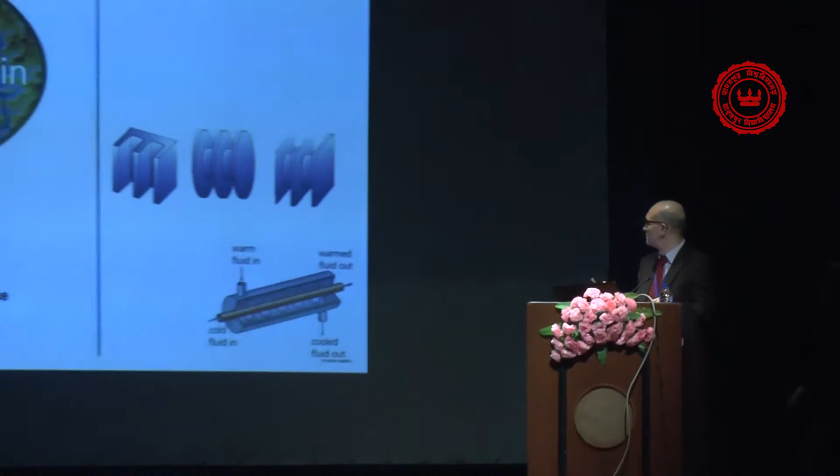What I plan to talk about is something which looks more academic. I'll put some presentation because I saw that so many young staff or students prefer to remain on the dark side. So perhaps I will be able to attract them. I'll try to see if it works. No problem, I'll use my mouse. Yeah.

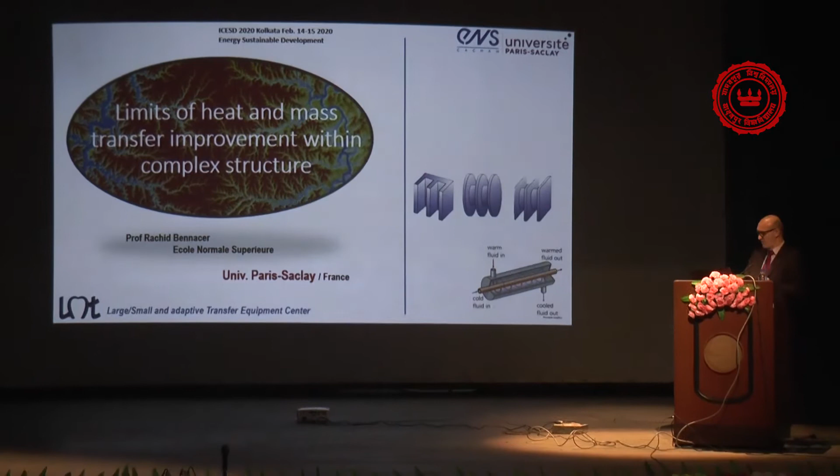Good. Before giving the talk, you may see that I am from University Paris-Saclay, which is near Paris. It's good also to present these things because it's good to know each other. Then we come back to the scientific aspect. Previously it was federal universities, and it includes my university, University Paris-Saclay. You see the founding members, and what is important is it integrates 13% of all French research. It has an advantage because it's a campus where companies or R&D companies establish or move on the campus to create some symbiotic things.

I thank the colleague previously from Tata who presented industrial work interacting with the universities. This morning we were talking about interaction between academia and industry. I forgot to mention there is another good formula we have in France. It's not only the ministry or government who give scholarships for PhD. We have what we name CIFRE. It means a PhD is hired by the company and uses the laboratory facilities, so he's really an employee of the company, which creates innovative subjects and others. Some of those I'll talk about later.

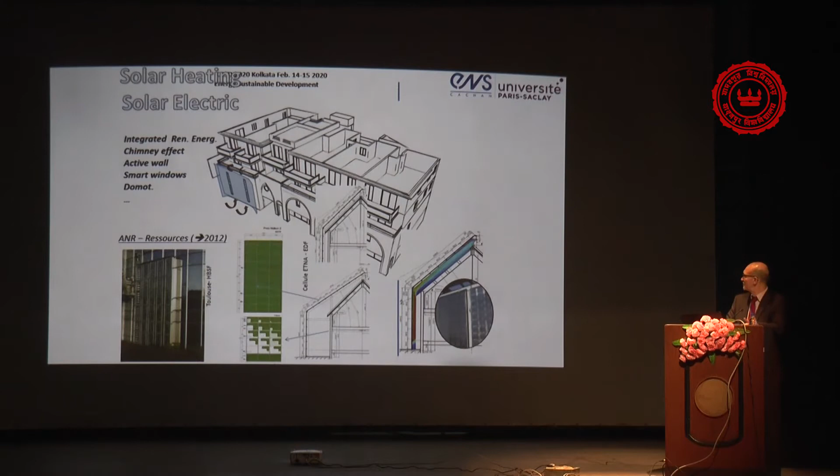What else? This is to forget about, no need.

We were talking about how sometimes people discuss what is fundamental, what is applied, and so on, which is the best. I like to say that they are all the best. Do what is useful.

This is one subject. It is on solar collectors. We work on hybrid solar collectors, so they produce electricity and heat the water. We did it in a lab. We did it in situ, and we also try, when the demand is uncertain or strongly variable, to define the new variables. I mean, also from a very applied subject, you can get a beautiful fundamental subject.

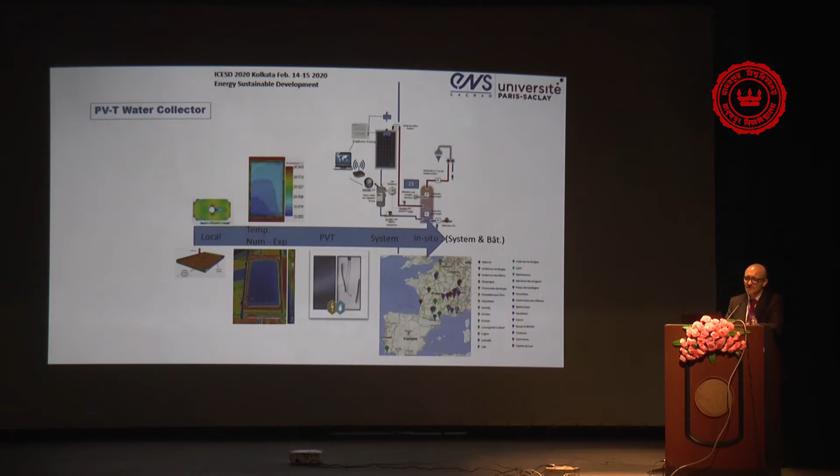In this case, you see all the points from Belgium in the north, on the map which is below on the left, until Portugal. Those are all the installations we put in situ, monitored and followed, and you can always find beautiful subjects. For this reason I say, if the question is well defined, then the answer could be beautiful.

What else can I say? Then I was talking about solar collectors. We were talking this morning about PV cells. I will not talk about the microstructure of PV cells. We are not in physics on this aspect. But just remember that the improvement of efficiency gives us the opportunity to multiply the produced electrical energy.

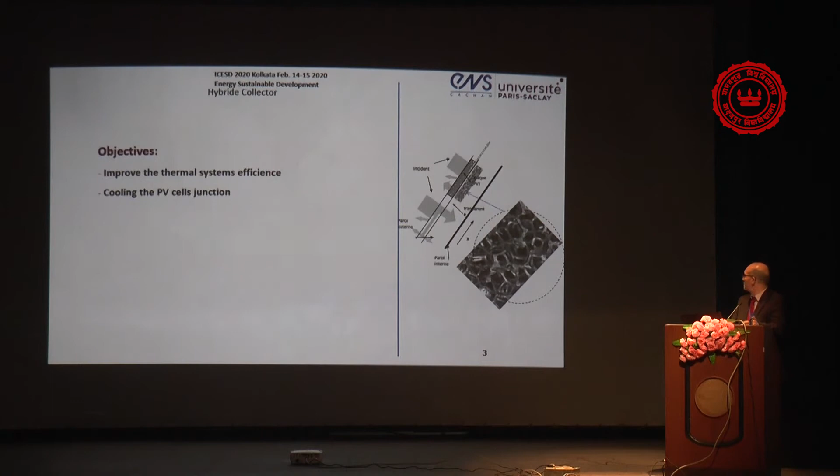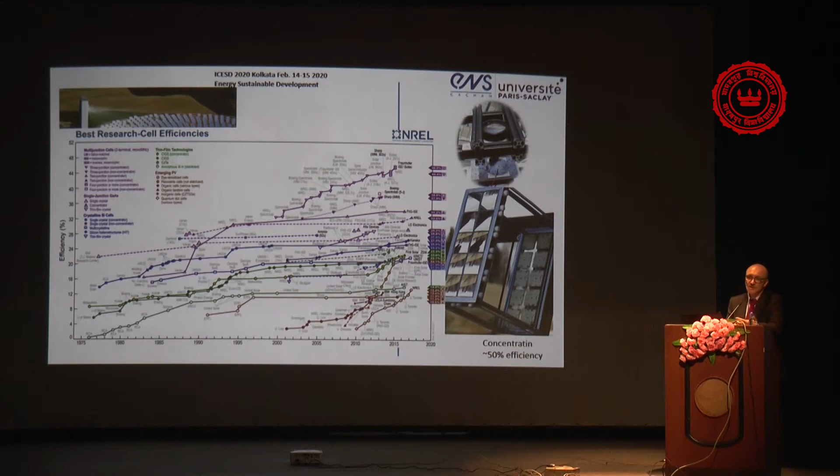So also if you work on heat transfer or mass transfer, we concentrate the energy over 100 times, so you have to be able to extract it. Either it is destroyed, or, even if the PV is not destroyed, remember that over 67 or 70 degrees you lose 0.5 percent per degree. It means if you have 10 degrees more, you lose 5%. So you can't afford such things. You have to control this cooling.

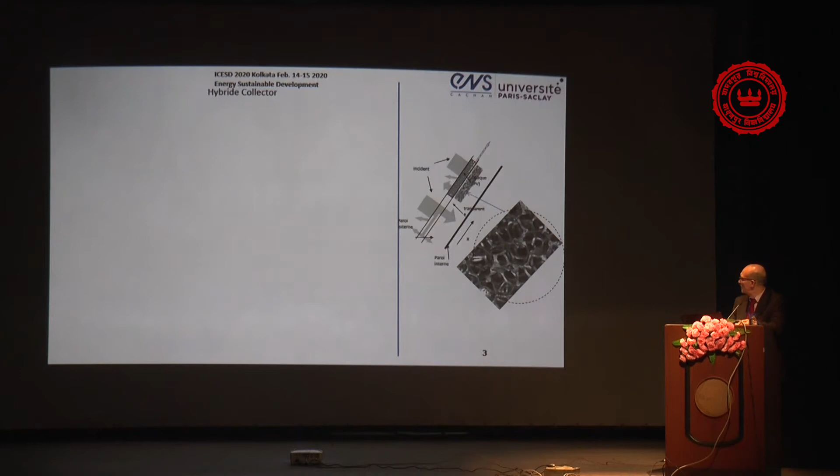This is just to show how to enhance it. It's just one example. People already did some work on metal foam and so on. I'll go faster on that. You can find exactly the same problem in cooling electronic chips because the density is increasing. So the question I'll deal with later is how we can extract a huge flux density and what will be the strategy. I'll teach nothing new to my colleagues, because we know that we have to enhance the flow. If it is turbulent, it is better. Then we will discuss how we can do better eventually. It will be our challenge.

People will think that I have Alzheimer's and I don't remember what I am talking about.

No, it's a joke. The heat exchanger, I come back to it later, shows that even if you have a good heat exchanger, unfortunately, and it's always the case, you work on a nominal point. What is a nominal point? All our optima are for a given point. But generally, in a system, especially in buildings or in solar, even if you do tracking, the heat flux density, or if it's electronics, sometimes works with very harsh and sudden demand. So remember that you create an optimal thing which works only a few minutes or a few hours. All the other time you are out of the optimum.

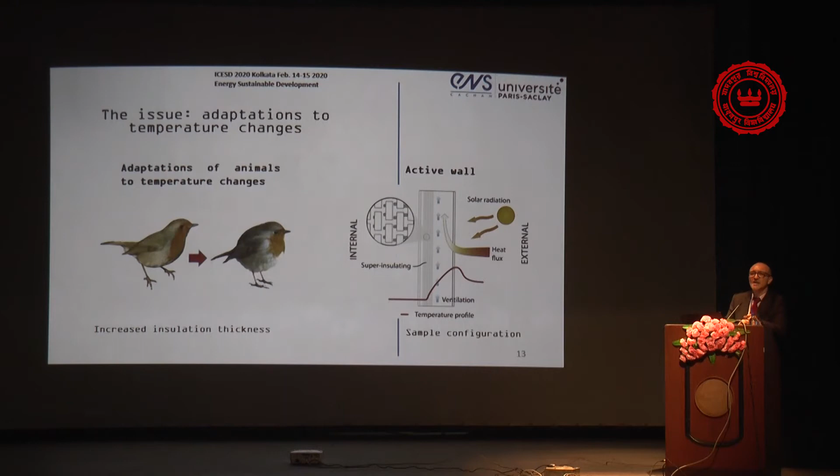But if we ask the question differently, are those two problems different? The answer seems yes, but they are exactly equivalent. Because what we are talking about is just a porous medium with a matrix and inclusions. If the inclusions are less conductive, it will be an insulator. If the inclusions are more conductive, it is enhancing, an exchanger and so on. So forget this, this is multi-phase flow, I think I go further.

I'll just try to see if this will run. No, it's always like that. No problem, I have very good movies with music. It took me a lot of time, but no problem.

I'll continue, no problem. But remember, all the images I'll put later were from these movies, except if any young people arrive suddenly and make it work. Yeah, I'll go through that.

So remember, we want to enhance heat exchange. To enhance it is very easy in principle. We need either to increase the surfaces, but generally the surfaces are fixed, or we have to increase the flow. Remember that we have a duality or antagonism between increase of the flow, increase of heat transfer, but unfortunately an increase in pressure drop. What else? So the gradient will be good.

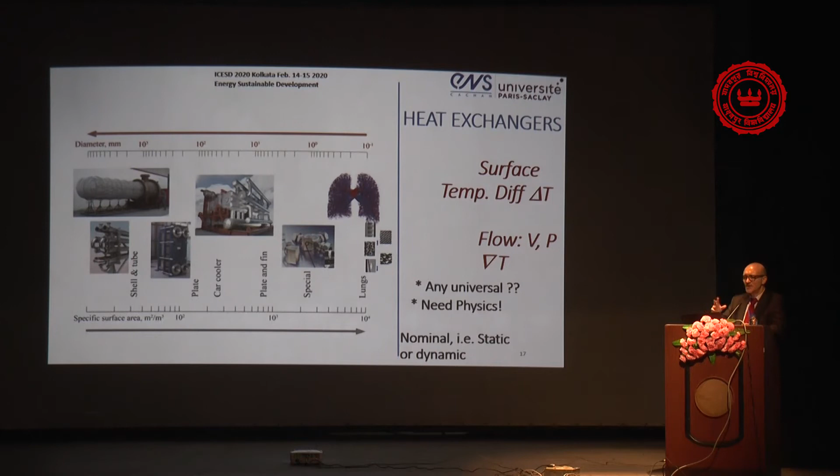I put some exchangers here from industrial to nature, and I was always discussing with some young researchers who is the most beautiful and who is the most efficient. There is no real answer, because it depends what you want to do. I'll come back later to thinking in a dimensionless way, because when we think in a dimensionless way, what seems completely different will become exactly equivalent. It's what I want to show here.

I know that it doesn't seem like a heat exchanger. I make a joke on the birds, which are adaptive, but I make a joke on the difference between chickens and dinosaurs. They are the same, they are the same family. Then people say, why is he talking about chickens and dinosaurs?

Because sometimes people go and study micro heat exchangers, macro heat exchangers, and the main question is, are they the same or are they different? On the technological aspect, they could be different, but on some aspects, they are exactly the same thing. So we are packaging things differently to discover results which are sometimes rewritten. It's the same problem for nanofluids. We have a lot of works running because we don't think in an equivalent way. I'll stop perhaps on that.

This is one of the images from the movies. It was a movie about undersea things. Those are classical fins. Then people will say, we're working on energy. But this morning I said energy and mass are equivalent, equivalent in reality and equivalent mathematically.

Here there are classical fins, and if you work on fins to enhance heat transfer, I wrote that it's well known. What I mean by well known is that generally we have a boundary layer classically, and we know that it tends asymptotically to some value, which is the asymptotic Nusselt value. I know that the entrance is very good; the rest doesn't mean it's bad, but it is less efficient. Positive and negative effects, which I will talk about later: pressure drop or heat transfer enhancement.

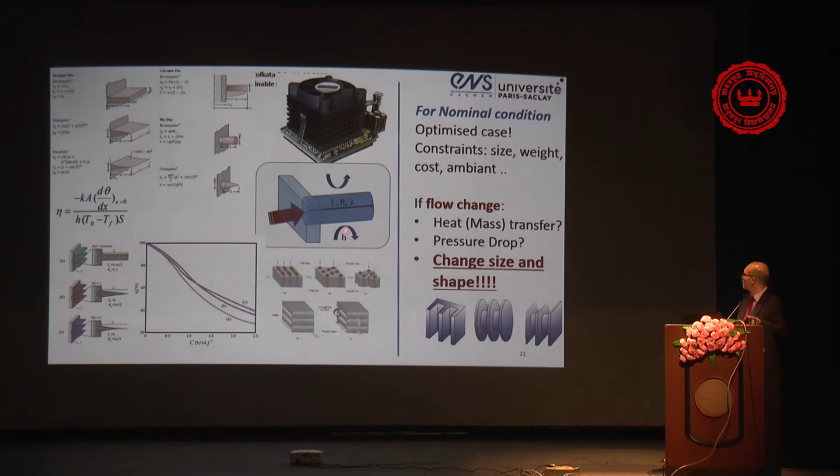Moreover, remember that when we study this analytically, the flow is constant and the H is constant. In reality, H depends on the position, and any change will change things. We can extrapolate from this system to those systems. They are equivalent. What I am talking about here is 1D regular. This is 1D, or let's say 1D homogeneous, 1D inhomogeneous, 1D inhomogeneous with a given shape. So I'm using words just for how much complexity I am putting inside.

If you see this, some people will say 1D inhomogeneous, the shape is changing. This is just to reduce the pressure drop. This was for cooling a processor. They shaped it in a special way so that the air flows here with less drag or less pressure drop. What we have to keep in mind is that the H here is different from the H here. This could be better than this and so on. But remember it's 1D, inhomogeneous in 1D or inhomogeneous in space.

This, which seems complicated, or this one, are 2D. Then you have some people who already analyze, sell and install these kinds of things. It seems 3D, but in reality it is 2D because it's just an extrusion.

It's a 2D inhomogeneous. Some other people came, and it allows a lot of things. They came and used metal foam. I say metal foam, but it could be ceramic foam and so on. It depends what you want to do. It could be a process, it could be catalyst, it could be heat transfer. When it's heat transfer, we will mainly use something with high conductivity.

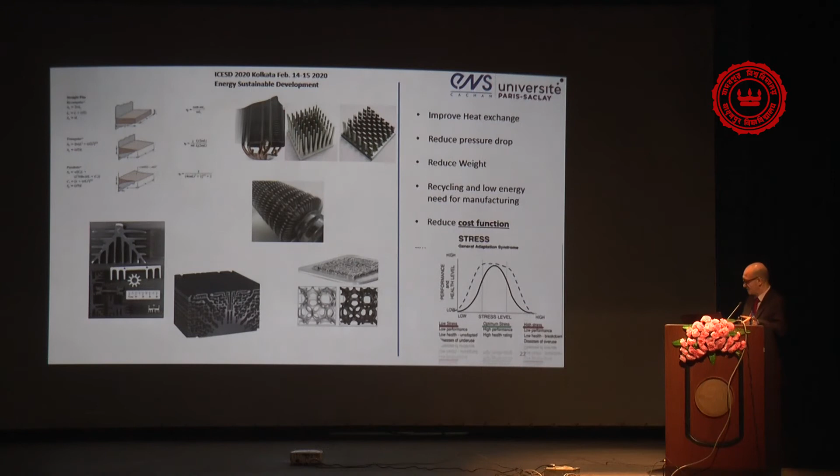I am talking about cost function. In the cost function, you can include whatever you want. What I want to do is to create something not working at a nominal point, but due to some external stress, it adapts, and my working range could be that. This will be the deformable or other, we will come back later. This I can continue. It's what I am talking about, change in space. This is classical.

As we finish the 1D homogeneous, partially known. This is another, unfortunately, beautiful movie you didn't see, Under the Sea, with the nice music. If someone is interested, I can show it later. So I wrote it's partially known. It's not classical fins like what we saw. You see it's special fins in a cylindrical way, structured in some way, but we can say that it's 1D if I am cylindrical, but inhomogeneous.

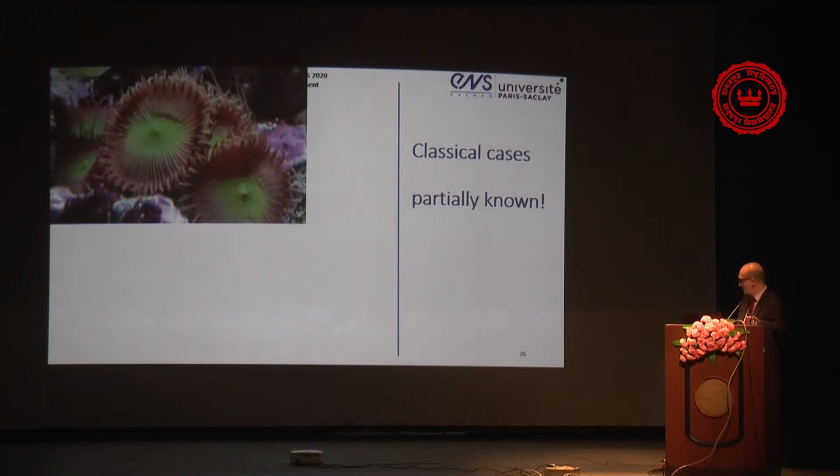Some people say, but there is no heat transfer. It is exchanging some nutrients and some other things. Instead of scalar T, it is a scalar C, concentration. So they are equivalent for me. Let's continue.

Perhaps just before, I want to mention this convection diffusion, the asymptotic I already talked about, this entrance, and the asymptotic classically; this was for most students, but for us, we will see mainly this. Perhaps I remain just on this. Three, restructuring flow using complexity. The anti-baffle is another thing on which we put patents. We will discuss if we have time.

With the computing ability now, if you put a hole, this is classical 1D; if you put a hole, you are structuring it in 2D, you are modifying locally H, and you are increasing the apparent section. This is just to show this. This is an extrapolation of that. We can compute; this is one of my master's and PhD students working, this was another study before. I mean the power of computing, no problem. Here it was to show how the flow is going and how it became unsteady.

Sometimes the video doesn't play. I just show this from another group working. This is 3D. Some people will say 3D inhomogeneous. Yes and no. Because you see it's metal foam, but they structured and cut part of it. It looked like this, fins, and they put holes in the fins. Is it inhomogeneous? The answer is yes, it is inhomogeneous, but there are some problems or some limitations on that.

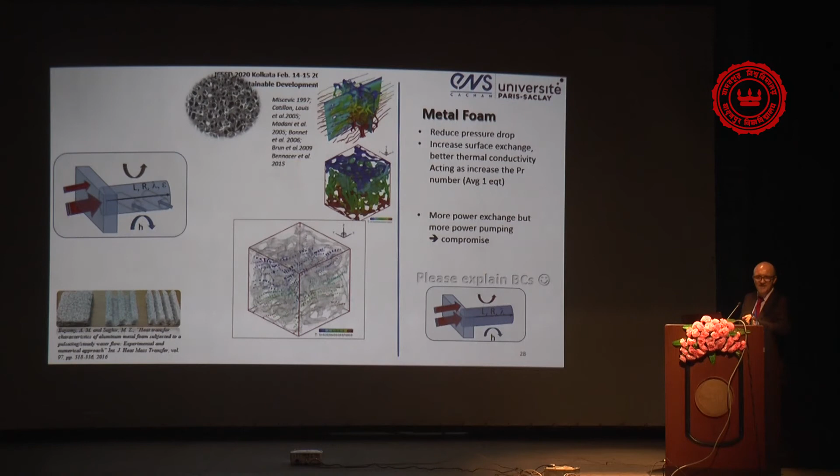You know, sometimes you'll see some message like that. Generally, it's for me, because sometimes I pass very fast. Good.

This, now I come back to the heat exchanger. People who do numerical work, this is just between brackets. I added it just for students to understand that people interested in porous media use it as one phase. This is reality, this is grid, this is 2 equation. Perhaps people who did this: thermal equilibrium, 1 equation, 2 equations connecting, and the direct numerical simulation.

What I'll present here, what we are doing, is this one, where we can come back to what is the limitation of this and what is the limitation of this, if we have time. This is a classical joke. This is Navier-Stokes. This is turbulent k-epsilon and so on, with all the coefficients to fit with the reality.

If you want to make a joke, I hope I didn't lose all of you. Laplace, I didn't put his photo in the beginning, was very good in mathematics. He said, if you want to draw a line, you need 1 coefficient. Surface, 2 coefficients. Volume, 3 coefficients. Elephant, 4 coefficients. Dancing elephant, 5 coefficients. You see?

And sometimes the students, when they work on turbulence with mu1, mu2, F1, F2, sigma, they come back and say it doesn't fit. Somewhere the physics is lacking. But it could also be experimental work, because they don't use just dancing elephant 5 coefficients. If you have 9 coefficients and you don't fit, perhaps the strategy you are using is not good. I stop my joke on this part, and I continue.

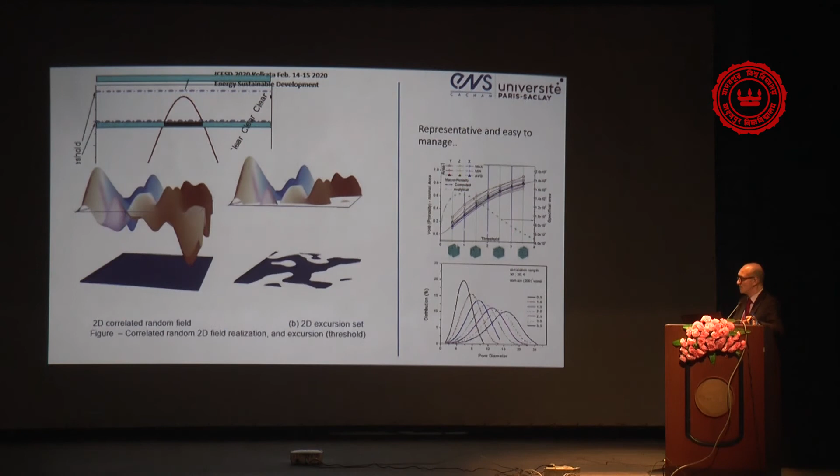I can continue. Excuse me, Professor Rachid. Okay, good, thank you. When we understand that, I can go very fast. Those are numerical results, it's details for us. I go on that.

What happened? I add another complexity: if you see in nature, heat exchangers are inhomogeneous, not inhomogeneous in distribution and globally homogeneous. They are inhomogeneous in space. We want to control what you see here: this is homogeneous, this is inhomogeneous. So we are creating structures we control over space. Then some people will say, yeah, but what will induce the heat transfer and so on? I agree with you, we will come back to that.

But what we are saying now, I give degrees of freedom to generate structures analytically, threshold them, homogeneous or inhomogeneous in 3D. The rest is just an optimization algorithm. Under some constraints, find the best one.

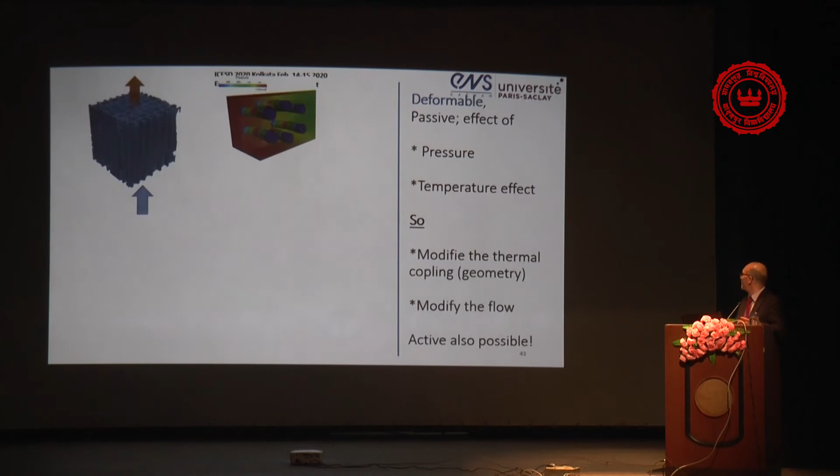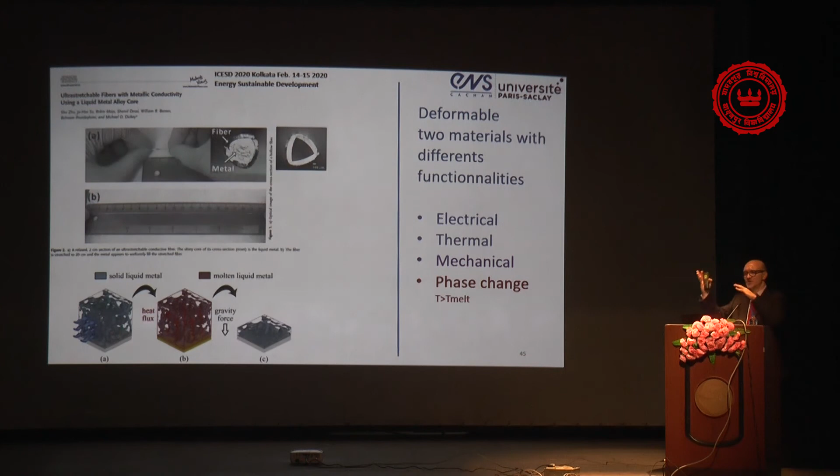Here I insist on one thing. This was a paper for electricity. You see, it's not energy at all. People are using liquid metal. If you use metal foam, you can create bi-material structures. And I come back later because the printer now allows it. We work on bi-material structures. If it is with phase change, it can store or restitute energy. But if the shell is deformable, when it melts, it will change the form. I show you an example.

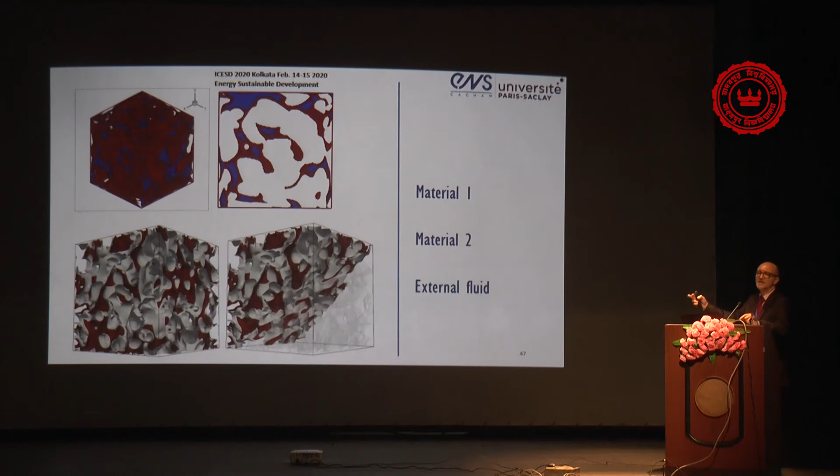This one, look. You remember, with the threshold, we are able to create this one, the red one, plus the blue. If I threshold again, I am able to create the secondary structure. So I am able to create one structure inside the second structure. The 3D printer now works relatively well. So if you have just two colors, you are able to print those. I am going through my journey, you see. I'm making 3D structures, which could be inhomogeneous. Now I add functionality of something inside, deformable and non-deformable.

This will be a micro-exchanger. This is a macro-exchanger. This is technologically complicated. It is equivalent. But in reality, it is easier because it's laminar. I mean, the difficulty is this one, working at very low Reynolds number. Just this is my joke about that, and then I'll not continue the experimental.

When you admit that we have a structure with a liquid inside, you see, we were previously working on fins to enhance heat exchangers, where inside I have two colors. When you admit the existence of fins with a second inner part, with a flow outside, you can consider that the secondary flow, the second material inside, can flow. What I present here is exactly what I presented previously. One flow can go out of your fin. As your fin contains secondary material, it can flow. We pass from fins to heat exchanger. It was fins 3D volumetrically structured. It became a heat exchanger 3D volumetrically structured.

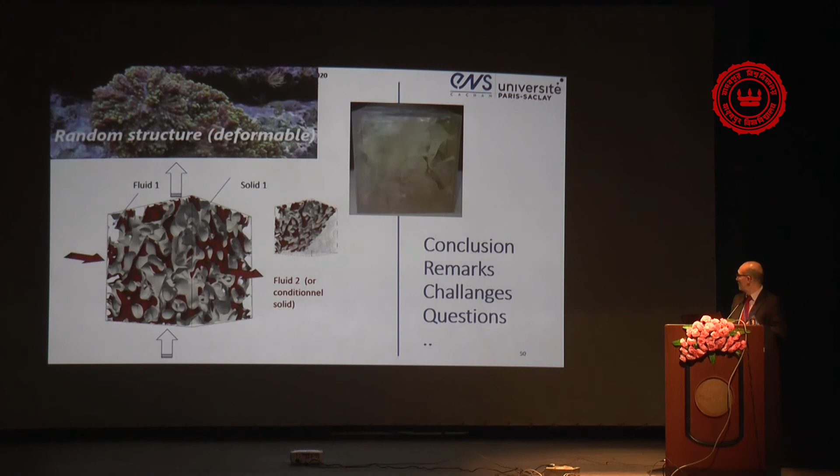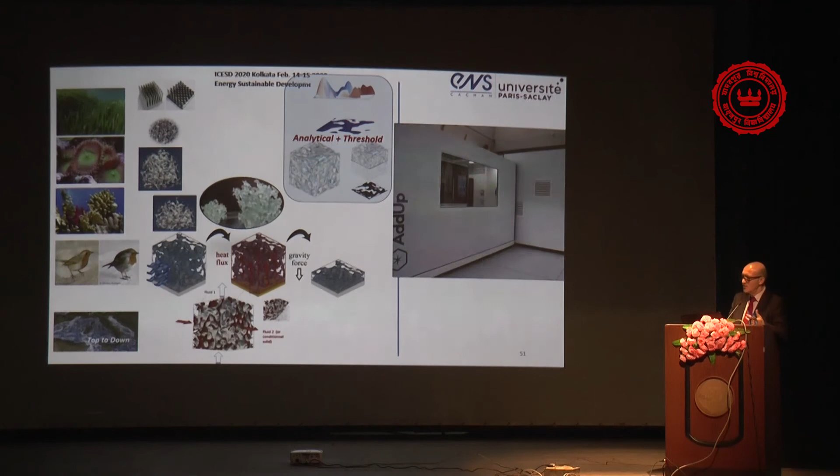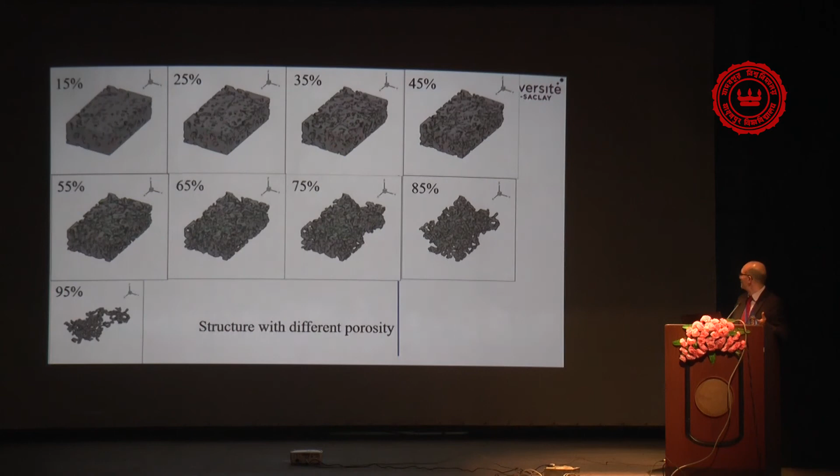Some people generally want to know if my movies work. This is this one. This is structured. This is the inhomogeneous. Those are the deformable. These are the heat exchangers. We got just some problems. This is our 3D metallic printer. Unfortunately, what we got doesn't fit very well, so I don't present it. I have only a few of them. What you see here is the experimental work with classical surfaces controlling different porosity, and this is the experimental apparatus, and I think no need to go further.

What can I say? Perhaps I finish with that, if the chairman agrees. This we saw, that they are equivalent. This is a heat exchanger, but it could be a 3D structured volumetric heat exchanger. I was discussing that it's a heat exchanger, but normally there is no obligation. It could be a catalyst. When you work on reforming, I know that in India there are several labs working on reforming. I can use catalytic external, catalytic on the inner part, because one is exothermic, the other is endothermic, and previously we had to bring energy and cool the other. By this system, you use double catalytic surfaces, and in two levels of process, coupling them like the classical heat exchanger. Here it's a mass, reactional, and heat exchanger.

I finish with this bad joke for some PhD students whose life remained sticking to the computer, looking at the screen, and trying to get the answer, but they don't ask themselves if it is the good question they are asking.

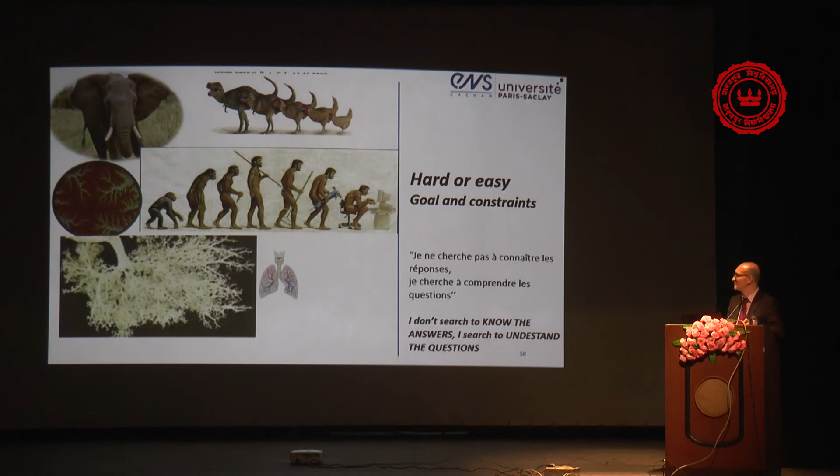It means I was not very clear, huh? Thank you. Sir, I just want to improve my understanding of whatever you have spoken. Is it the changes in macro level or micro level, or both? Or if you hear me, I can answer from here. Pardon? You can hear me from here? That is macro level or micro level?

Thank you for the question, and I didn't expect so good a question because I forgot to mention that. Some people work on micro channel, and they come back and say, we work on micro channel. And my question is, what is the size of your micro channel? And I make a joke because long ago, in the beginning of 2000, we worked on micro channel, but we faked the system because our micro channel was 900 micrometers, which means almost 1 millimeter. So the question, micro or macro, is it a concept or what?

You are right, it could be micro when the continuum equation stops being good and mathematically we change, rarefy something, we change the equation and the boundary condition. If I am in this amphitheater and I create a void, I'll ask people to get out first. I close all the doors, I put a big pump, and I take all the air. I'll be in micro channel. On this size, it's micro channel, because as I have less and less air, less and less mass, I have a big mean free path. I can go in micro channel, increase the pressure, and I am in macro channel. So you are right, is the Knudsen number below or higher?